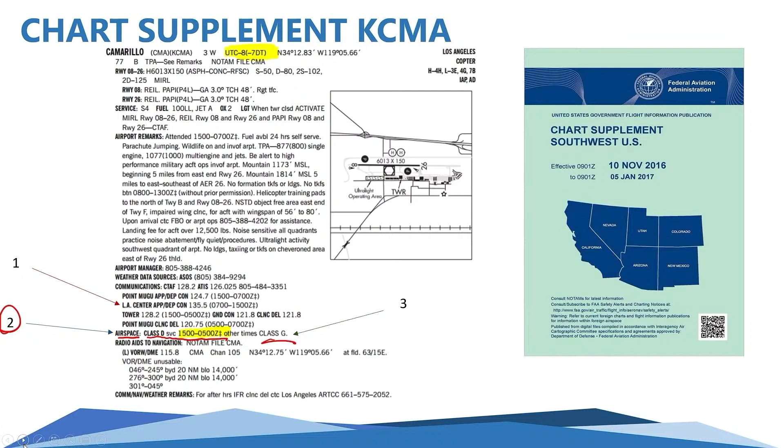The other thing that we also want to talk about is anytime you go into a class Delta, before you penetrate the airspace, you need to basically have permission to go into that airspace. So assuming that the tower is open, you need to establish two-way radio communication. To establish two-way radio communication, you basically need to call up the tower, whether you're taking off or you're coming into the airspace, and you just need to have them acknowledge you and your call sign.

So very simply, if I'm going to be flying in from, let's say over here, which is the east, and let's say I am Cessna 1234, that's my November 1234. All I need to do is say Camarillo Tower, Cessna 1234, about 10 miles to the east inbound with Victor for a landing. As long as they say Cessna 1234, continue, that's fine. Cessna 1234, number 2 straight in, landing runway 26, clear to land. Those are all going to be considered establishing two-way radio communication.

Now, if they say Cessna 1234 standby, that is also considered established radio communication. If they say Cessna 1243 because they get my call sign wrong, that is not going to be established. So you just need them to repeat your call sign. Unless they tell you explicitly to stay out of their airspace, you are going to be deemed to be establishing that two-way radio communication as long as they say your call sign.

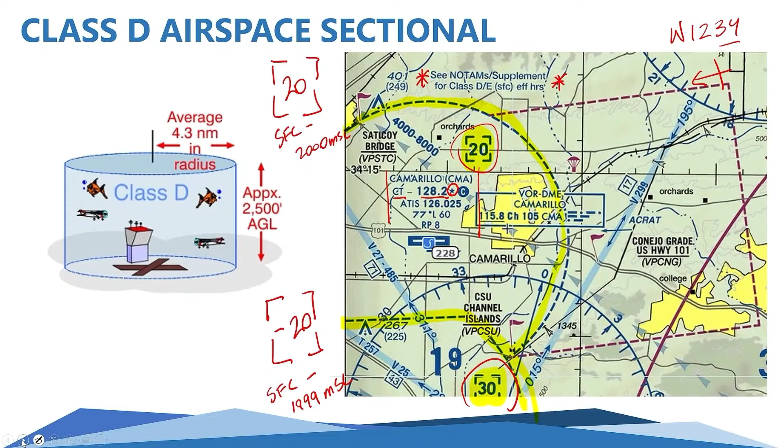So that is what is known as establishing two-way radio communication. The other places that we can find the information is there is a tower frequency. If you were to open up any of your charts, whether you're looking at your sectional or your TAC chart, somewhere along the edges they will have all of the information for the tower frequencies. It will let you know their hours of operation. It will also give you the tower frequency, the ground control, ATIS, which we'll talk about a little bit more, and the hours as well. So those are all included on there, even though you're going to find it right next to the airport as well. So that is basically Class Delta in a nutshell.

Class Delta, for the most part, is not going to remain Class Delta indefinitely, meaning that the tower is usually not in operation 24/7. Very rarely does that occur. Even at the busiest general aviation airport in the world, which is Van Nuys, that also closes, I believe, around 10 p.m. local time. So Class Delta airspace, just remember, is going to be surrounded by that blue cyan dashed line, and your dead giveaway for Class Delta, as I said before, is going to be that box with the number in it. So here for the Eugene Mahlon Sweet Airport up in Oregon, the Class Delta goes from the surface up to 2,900 feet.

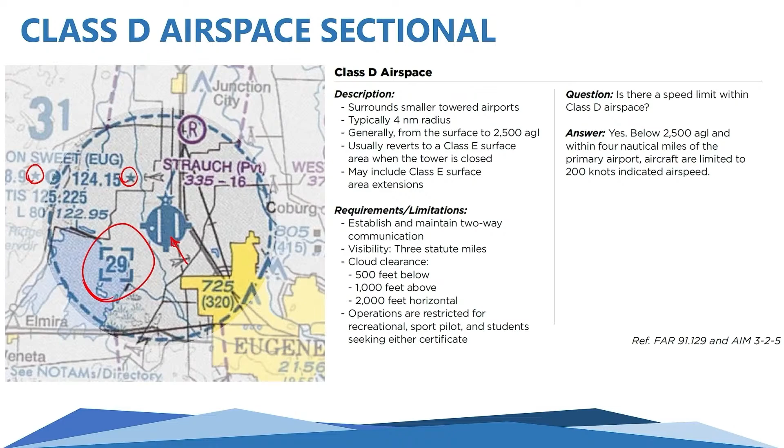We know that it's a towered airport because, remember the color coding of the airport, that cyan color means that there's a control tower. But also, if we were to look at these stars here, we know that the control tower is not open 24 hours a day. So we would check that green book and confirm what it's going to revert to. It's either going to revert to a Class Echo or Golf, and it will also give us the hours of operation as well. So remember that anytime you're flying within here, going back to our Airspace Triangle, this is the 3152. This is the Class Delta right here, and that's your 3 statute miles of visibility, 1,000 above, 500 below, and 2,000 feet horizontally.

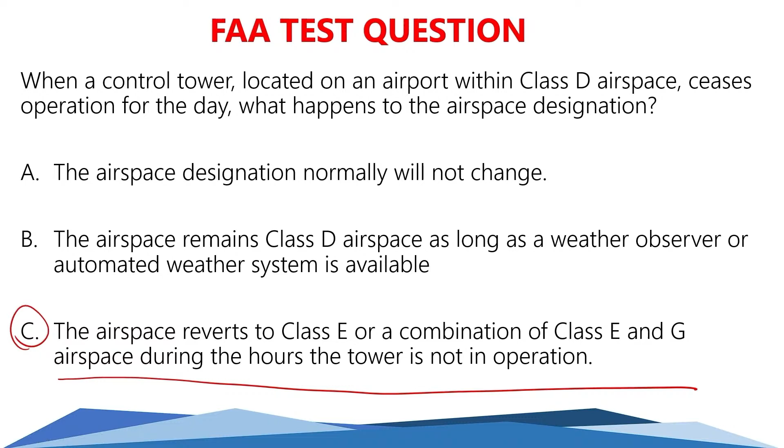And where we find this information is in the chart supplement, which is that green book. And like I said, we'll show you guys exactly how to see that and how to actually read that document on Wednesday. All right, moving on to Class Charlie.

Class Charlie looks like a simple upside down wedding cake. It always has 2 layers. There is an inner layer that has a radius of approximately 5 nautical miles, which basically goes from the surface to roughly about 1,200 feet, it just depends on the actual airport. And then the outer layer is going to extend up to a 10 nautical mile radius. And like I said, it just looks like an upside down wedding cake.

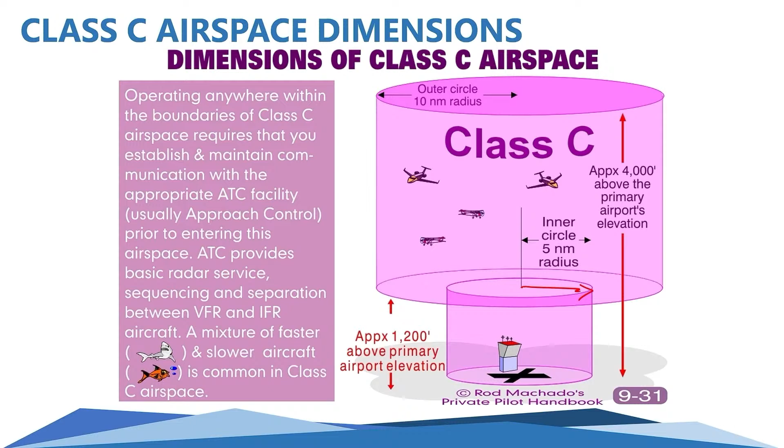Traditionally, the maximum altitude is going to be 4,000 feet AGL, so 4,000 feet above whatever the primary airport elevation is. Now, they're not necessarily all going to be perfectly circular like this. If you're in the Midwest and there's really no obstacles, then you'll probably see them nice and circular. Depending on where you're located, they might be staggered with different layers in them. So, for example, Beale's Class Charlie airspace, or the one that I'm going to show you, which is going to be the Santa Barbara Class Charlie.

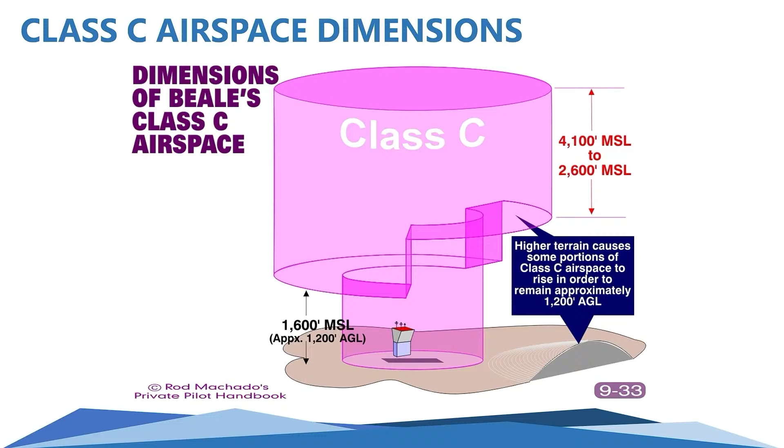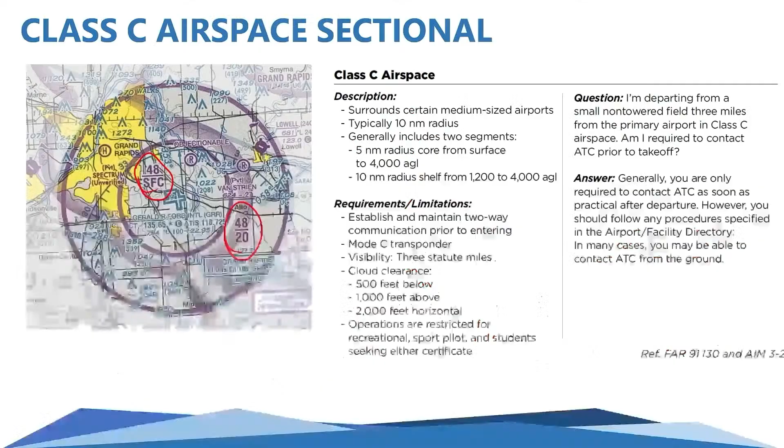All right, let's test your knowledge with the potential vertical limits of your Class Charlie primary airport. The vertical limit of Class Charlie airspace above the primary airport — remember, there's an inner ring and an outer ring. We don't care about the outer ring. We want to know what is the normal vertical limit of the inner ring. Is it going to be 1,200 feet AGL, 3,000 feet AGL, or 4,000 feet AGL?

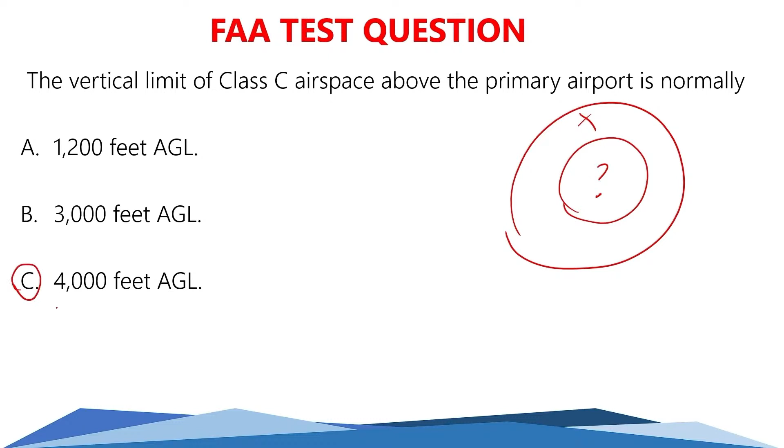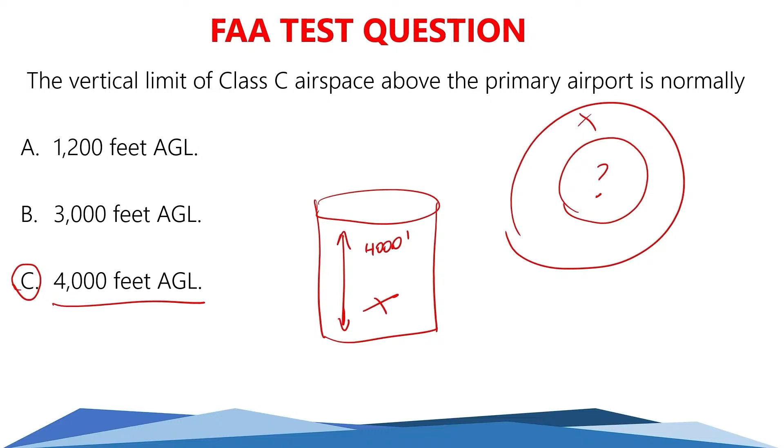All right, let's take a look at it. We got 25% of the class with A, 8% with B, and a majority of 65% of the class with C. So the correct answer is C, it is 4,000 feet. Basically, it depends — remember, this is AGL, above ground level. So traditionally, that inner ring, depending on wherever that airport is located, the vertical height of this is roughly 4,000 feet tall. You're just going to have to figure out, depending on where it's located. Obviously, if it's in mountainous areas, it might have a higher value than that, but the actual height is not going to be larger than 4,000 feet.

All right, the last airspace is going to be your Class Bravo airspace. This is your biggest and busiest airspace — think big, busy, Boeing as keywords. These do have control towers as well, and for the most part, most Class Bravos are going to be operational 24/7. These are the biggest and busiest airports in the country: Los Angeles, San Francisco, Vegas, Phoenix, Dallas-Fort Worth, Houston, Miami, all the New York airports, all the DC airports, Boston Logan, Nashville, Chicago O'Hare, Seattle, any of these. I think there's about 22 or 23 that exist around the country. And they look like upside down wedding cakes.

Some of them are very simple in their design, and some of them are not necessarily circular. In the Los Angeles area, we have one that is not really circular — it's kind of all over the place, I don't even know what the shape of it would be. But what you'll have is different layers. It will usually go from surface up to 10,000 feet MSL.

Now, to get into a Class Bravo, instead of just establishing two-way radio communication, you also need to get a clearance. So when you call up the controller, you're basically going to ask for clearance to get into Class Bravo. And the magic words you need to hear are your call sign — so, 'Cessna 1234, you're cleared into the Los Angeles Class Bravo airspace.' You've got to hear 'cleared into the airspace' and also your call sign. If you don't hear that, then you're not allowed to go in.

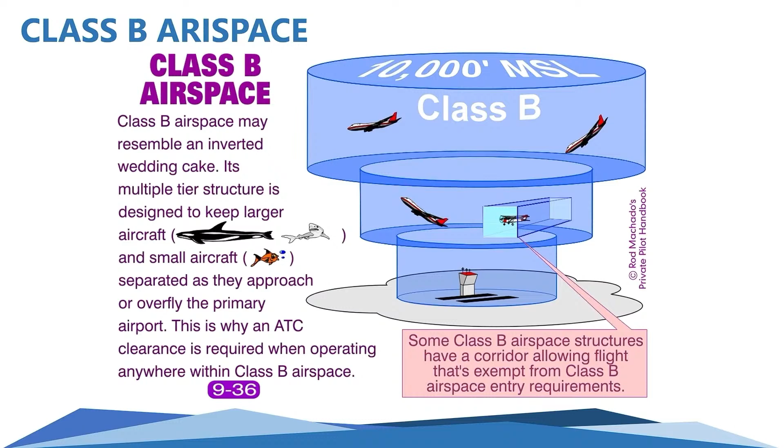We'll talk more about transponders, but there's a test question coming up called a 4096 coded transponder. A transponder is basically the way that air traffic control can see you. It's called a 4096 coded transponder because there are 4,096 potential unique codes that transponder can spit out. We'll get into more about the operations of that system on Wednesday.

Class Bravo is going to be at those larger airports. They're going to have multiple different ceilings and floors. Majority of them are from surface to 10,000. There are exceptions like Boston Logan, where the highest altitude is up to 7,000. If you go to higher airports like Denver or Salt Lake, they actually go above 10,000 just because the airport elevation or field elevation is already fairly high.

The inner ring that we see here is going to be a solid blue, and the solid blue is from surface to 7,000. We have an outer ring from 2 to 7,000, and then another ring from 3 to 7,000. There's another portion in this corner which is 4,000 to 7,000, and basically everything else here is 4,000 to 7,000.

The way that you can identify a Class Bravo is going to be a solid blue, that solid cyan color - that's your rapid identification. Remember, Class Charlies are solid magenta, solid blues or cyans are going to be your Class Bravos. Just like we saw before, if you look at the edges around a Class Bravo, you'll also see who owns it. It should say somewhere around here, Boston Logan Class Bravo. I believe it's cut off on the map at the top here that's unshaded.

The other thing you'll also notice is something known as a Mode C veil. It's basically a 30 nautical mile ring that extends from the primary airport, which is Boston airport right there, and it goes from the surface up to 10,000 feet. Anytime you're flying within the ring and also within the Class Bravo, you need to have a Mode C encoding transponder. Mode C, besides just providing a location, is also going to provide an altitude to air traffic control.

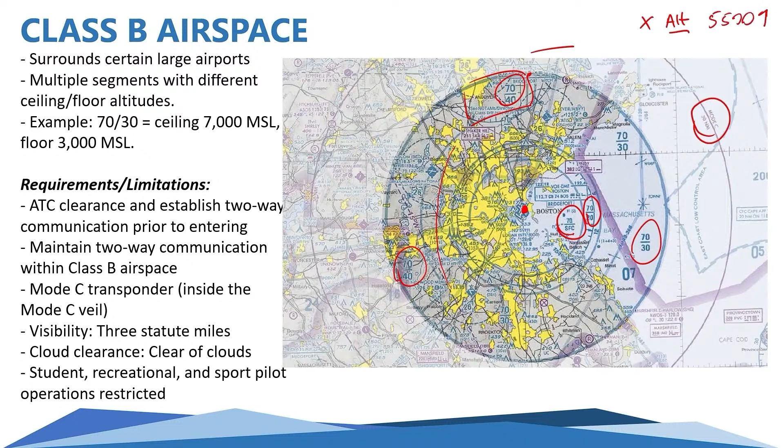So you're at 5,500 feet and you're climbing. The most basic type of transponder is called a 4096 coded transponder - that just provides the location. But if you have either a Mode C transponder or a 4096 coded transponder with altitude capabilities, then it's going to provide the target and also the altitude to the air traffic controller. That is effectively what a Mode C transponder is, and we'll talk more about the operation of that moving forward.

Now, the other thing we'll also talk about is the 3 statute miles of visibility, clear of clouds. A lot of people were asking yesterday what that means - clear of clouds. You can get as close to a cloud as you want, you just can't have any part of the aircraft go into the cloud at all.

Then finally, this is one where there are certain licensing requirements. For the most part, student pilots can fly into Class Bravo airspace, but there are about 12 or 13 airports around the country where you do have to be a licensed pilot, meaning a private pilot or higher, in order to actually land at the facility.

So what we mean by that is the primary airport that the Class Bravo is basically protecting, in this case, is Boston Logan. If it's on the list - and I have to go pull the list - I can tell you, like San Francisco International, LaGuardia, JFK, Los Angeles International, those are airports that a student pilot cannot land at because they're off limits. But if you're a student pilot, you have the ability to fly in and around a Class Bravo as long as you have certain endorsements from your instructor and additional training along the way. Okay, alright. Then finally, we have our special VFR.

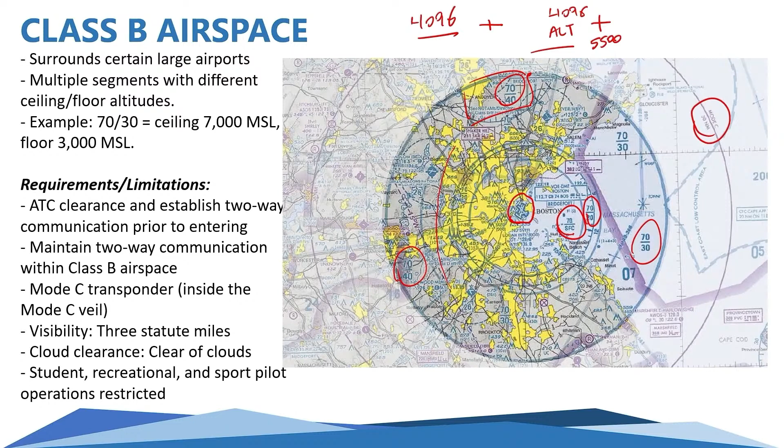Remember, basic VFR is 3 statute miles of visibility and at least a 1,000-foot ceiling. You're going to see this number a lot, so commit it to memory. The ceiling is the lowest of either the broken or overcast layer, so anything less than these values is going to be considered IFR.

Now, in the event that you're trying to get out of the airport or back into the airport, and it's going to be considered IFR at the airport, you can request something called a special VFR clearance. For special VFR, you need basically 1 statute mile of visibility and to remain clear of clouds. You want to be fairly certain you can get either into or out of the airport. It doesn't allow you to penetrate any clouds, but it might help out in the event that a marine layer is coming in.

So in this example, let's assume your airport is down there, and you can't go into any of the clouds, but if you see a gap like this, you could start descending early, and assuming the airport is IFR, you could potentially get back into that airport.

Just use caution when you do this. Keep in mind you don't want to do something called scud running, which is basically flying right against the ceiling of the clouds, trying to fight terrain. A lot of times people get into accidents because the terrain rises rapidly and you're not paying attention, and obviously you can't go through the clouds, so you're kind of stuck. A lot of times it's just better to call it a day and not fly in those conditions.

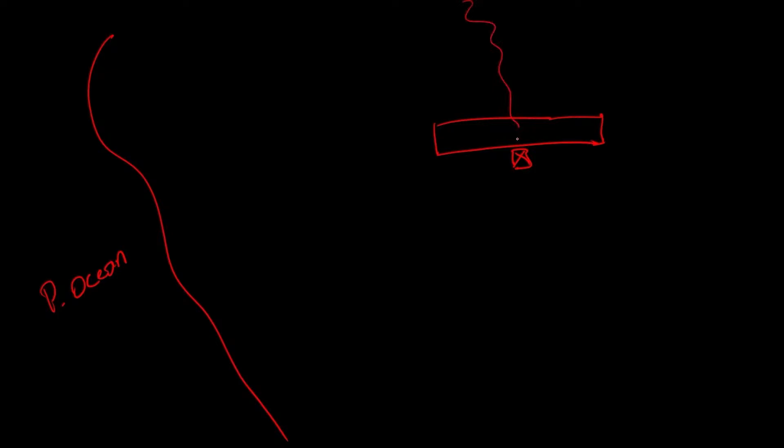At certain airports like Camarillo, we actually get a marine layer quite frequently. Here's basically the Pacific Ocean over here, and we have a runway right here, with the weather sensor happening to be right smack dab in the middle of the runway. A lot of times the marine layer comes in like this, and it's going to cover up the weather sensor, where it's going to report conditions of basically a 900-foot ceiling, which means the airport is now IFR.

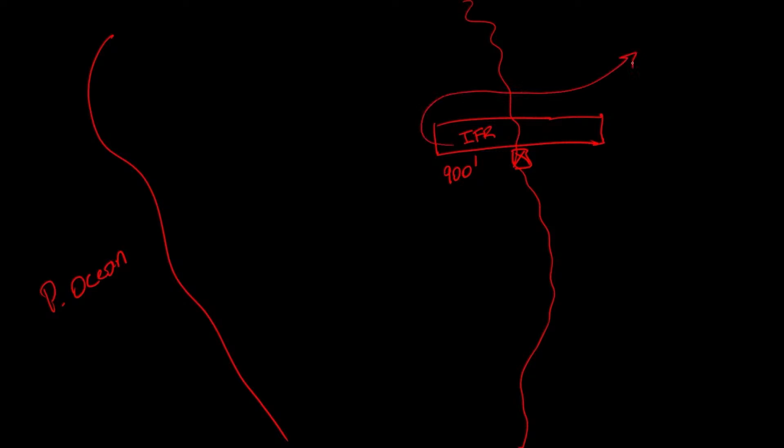Yet everything to the right of that squiggly line is basically going to be clear, clear as day, and potentially you're coming back into the airport. You could request special VFR, or maybe you're doing a big trip to Vegas and trying to get out of the California area, so you could request special VFR to get out, stay below 900 feet, and then climb over to Vegas where it's nice and sunny. So there are some exceptions, and you want to be very judicious if you're going to be using special VFR.

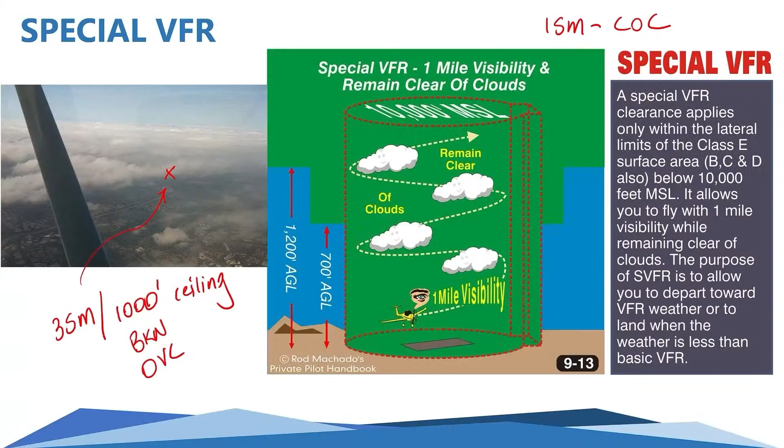Then finally, we've got some of our VFR corridors within Class Bravo. Anytime you're within Class Bravo, especially the LA area, I showed you guys all the different ways to get in and around. You'll see these arrows that go up and down, and there's one right here for the mini route, the coastal route. This is the Coliseum route, and I think this is called the Hollywood Park route. So we could look on the TAC and figure out how to actually traverse the Los Angeles area, because we can't just fly anywhere we want in LA.

This is used by air traffic control to basically route VFR traffic through the Class Bravo airspace. You can find these only on your terminal area charts. The requirements are that you need air traffic control clearance, you have to have a Mode C transponder, which tells ATC your position and provides altitude information, and you have to adhere to the published route and any air traffic control instructions they may give you.

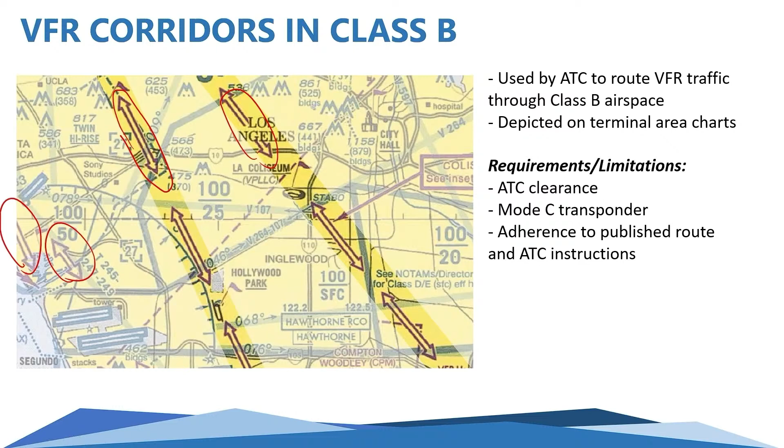All right, so what is the minimum radio equipment? Let me open up the poll here.

What minimum radio equipment is required for VFR operation within Class Bravo airspace? Is it A, two-way radio communications equipment and a 4096 coded transponder? B, two-way radio communications equipment, a 4096 code transponder, and an encoding altimeter? Or C, two-way radio communication equipment, a 4096 code transponder, an encoding altimeter, and a VOR or TACAN receiver?

If you didn't hear some of any of those buzzwords, it's probably not the correct answer. Mode C and ADS-B, that is correct, Josh. We'll get more into ADS-B on Wednesday and Friday as well.

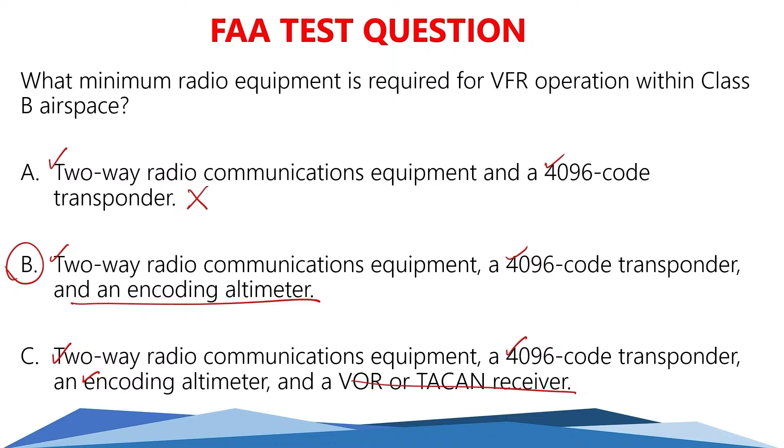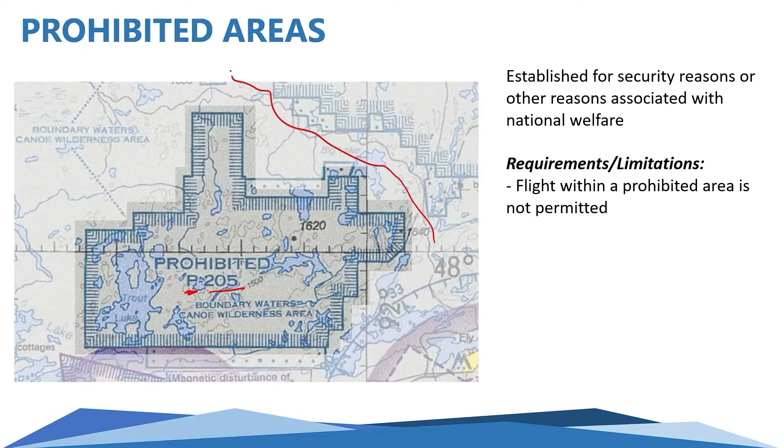You want to stay well clear of these and allow a couple miles for navigation purposes. I wouldn't necessarily try to sneak between two prohibited areas. Remember, prohibited means not allowed to be flown within.

Restricted areas separate civilian traffic from potentially hazardous military activities. They're identified by a blue comb symbol, and everything within this comb is restricted area 6402 Alpha. We can look up 6402 Alpha, which I'll show you after the break, to see the hours of operation and who to contact.

You do have the ability to fly through a restricted area, but you need permission from the controlling agency. Using R6402 Alpha, we can figure out who the responsible controller is and make that request. 98-99% of the time you can ask permission, but 98-99% of the time you won't get it—it just depends on what's going on.

So VFR flight is allowed through a restricted area, but only with permission of the controlling agency. Other than that, it's pretty much not allowed.

The next one is called the warning area. Warning areas are off the coast of the United States, either Pacific or Atlantic, extending 3 nautical miles off the coast. They warn pilots of potentially hazardous activities from the surface up to 10,000 feet.

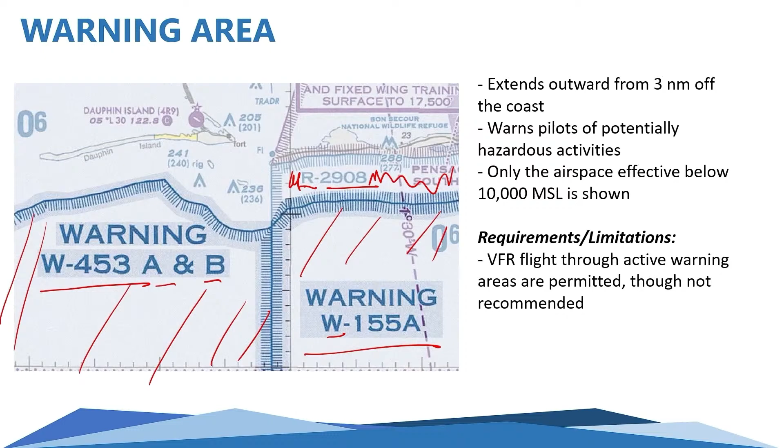You have the ability to fly through a warning area, although you always want to check if it's active. But even if you don't check, you can still fly through it. Right above that, be careful—here's restricted area 2908, so we can't fly through this area to the north unless we have permission from the controlling agency.

In some of the busier parts of the country, like up in California, these are called alert areas. They have a high volume of pilot training or unusual aerial activity, usually associated with an Air Force base. Alert areas have a purple or magenta comb, and always start with the prefix A, like Alpha 632 Alpha.

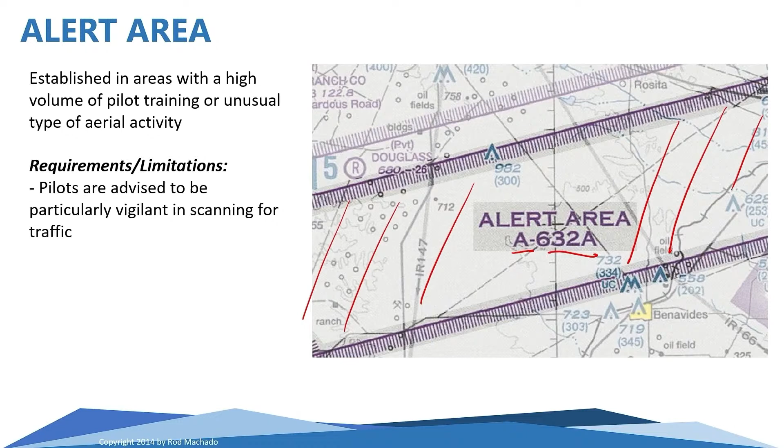You have the ability to fly through an alert area and don't need to contact anyone, but remember, anytime you're flying through one you want to be very vigilant and keep your eyes outside, always scanning for traffic, since it's traditionally a lot busier than the surrounding airspace.

You have the ability to fly through a MOA without contacting anybody, but use extreme caution if you do. It's always advised to contact the controlling agency to see if the MOA is hot or cold. Even if it's active and hot, you can still fly there—just use extreme caution.

MOAs are basically the same thing as a warning area. Warning areas are off the coast of the United States, while MOAs are inland, usually surrounded by restricted areas or very close to military bases of some type.

These are basically visual routes that we can see here. And it will either have three numbers, or it'll have four numbers after it. So typically, if you have a military training route with four numbers, that means that it's going to be a high-speed route at 1,500 feet AGL, above ground level, or below. So these are basically very low altitude, high speed routes. And then anything with three numbers after it is going to be above 1,500 feet AGL.

That is all in local time on those charts. The NOTAMs will be in Zulu time.

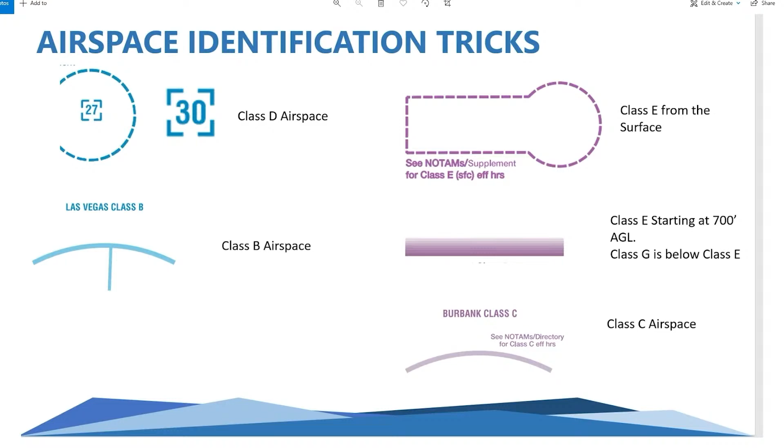All right, so we're going to move on to our Federal Aviation Regulations so we can get back on schedule. The Federal Aviation Regulations are known as your FARs. So I'll show you guys exactly what that looks like. To get the most up-to-date and accurate information, you always go to the government website. There are a lot of books out there. This is a book printed by ASA. There's a ton of companies that print these. Basically, they take the government regulations and print them. Now, the government regulations are adjusted far more frequently, so this is already outdated by the time it's printed, even though it's 2022.

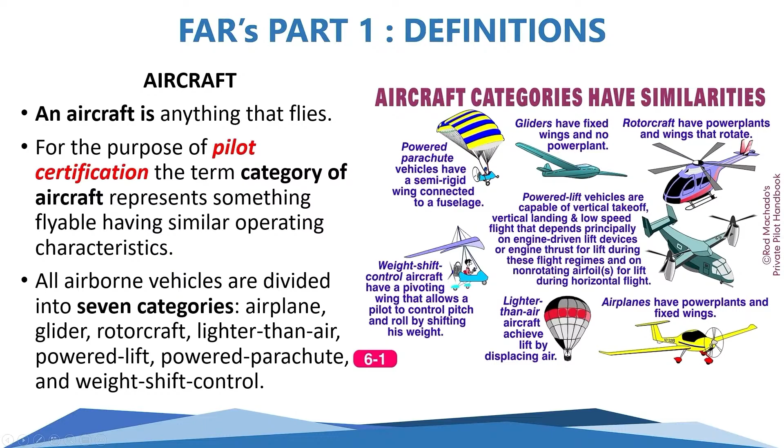So looking at your pilot certificate, assuming you all signed up on IACRA, like we said the first day, and got your student pilot license, you'll have your name and address and information there, and it will basically say student pilot with whatever your certificate number is. That will basically be the most simplistic license that you'll get.

As you progress through the system and get your private pilot's license, it will say private pilot on the front, and on the back it will show what you're basically allowed to fly. The category in this case is airplanes, and you can only fly single engine land. This is called the category, and the other one is called the class, which we'll talk more about.

For the purposes of pilot certification, aircraft are broken into basically four classes. You can either be single engine land, single engine sea, multi-engine land, or multi-engine sea. You'll have one of those, and if you end up getting additional check rides and licenses, you'll have more than that listed on your actual pilot certificate.

Just because you get airplane single engine land does not mean you can jump into a helicopter. It does not necessarily mean you can jump into a balloon or a glider. You have to make sure that you're licensed appropriately.

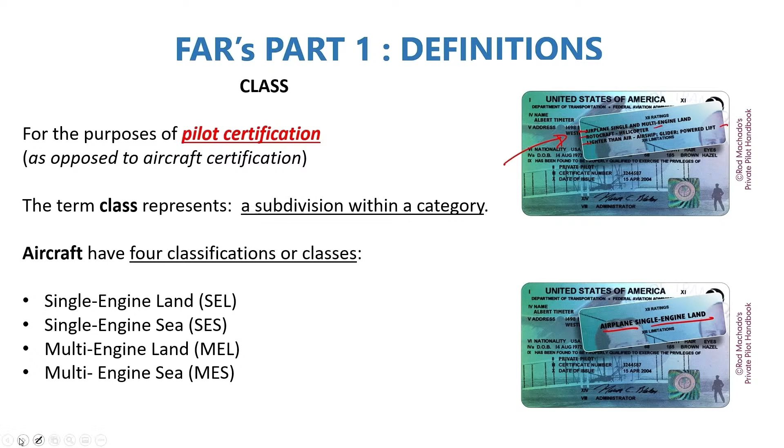The other thing we want to be aware of is something known as make and model. Make and model really only applies to you as a student pilot. Throughout your student pilot career, you're going to get a number of different endorsements, which is basically something very similar to what we're giving you here at the end of your training.

Once you pass this training and are ready to take your knowledge exam, you'll see an endorsement that looks something like this. It will basically say, 'I certify John Doe has received the required training in a specific' — and this is what we mean by make and model.

Normally you are not restricted to make and model — you're actually not restricted at all once you are a licensed pilot, meaning you have a private pilot certificate. We do not say that as a private pilot you can only fly a Cessna or a Piper or a Cirrus. You can basically fly anything within that realm as long as it fits within the category and class.

The make and model could be something like an A36 Beechcraft Bonanza, a Cessna 152, a 172, or a Piper Malibu. As I said, you'll be limited as a student pilot to any specific make and model endorsed by your flight instructor. Anytime you're given an endorsement, you have to follow it in terms of whatever the instructor actually writes on there. Once you're a licensed pilot, you're not going to be restricted to a specific make and model.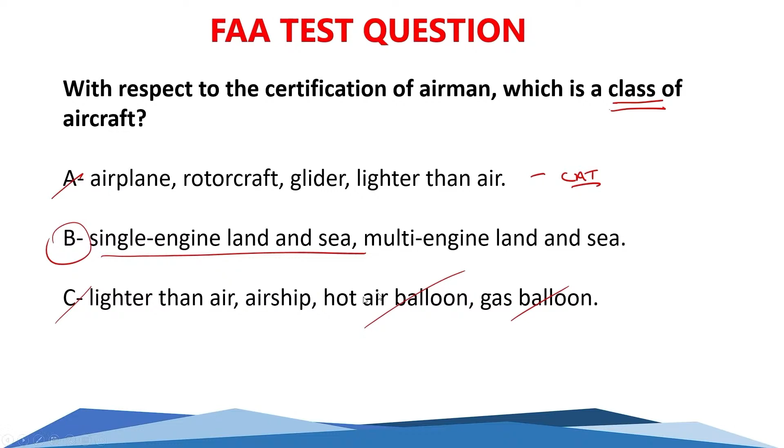90% of your attention when you're flying needs to be outside those windows, looking around, making sure that you are clear of other traffic. And then 10% is really looking inside to verify that the aircraft is doing what you think it's doing. So are you actually in a climb or a descent?

Are you holding straight level? Are you holding your altitude? So by doing this, we talked about this in our last lesson. We basically have a specific in-flight visibility that we have to maintain depending on the airspace that we're flying in. And we have a minimum distance either above, below, or horizontally from any cloud formation. So we're not actually allowed to fly into the clouds whatsoever.

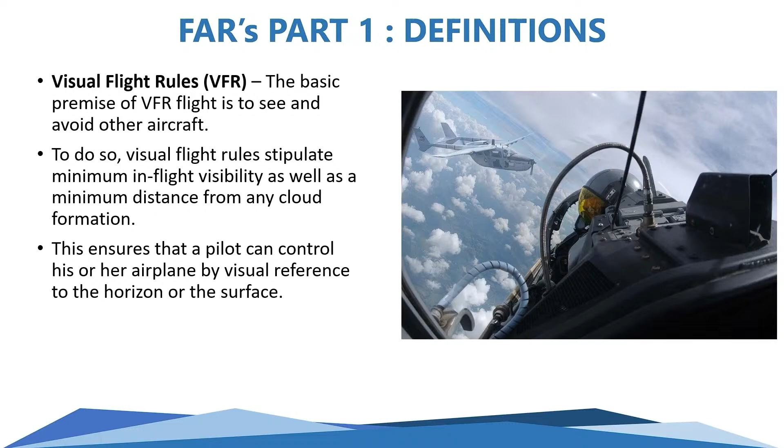And the whole purpose of VFR is that you should be able to fly that aircraft solely by reference, visual reference, to the horizon or the surface of the Earth. On the flip side, if you go beyond your private pilot training, you could get an instrument license, which is why we have the IFR class, the instrument class, learning all about the new regulations and the things we have to know as instrument pilots to fly in these types of situations. So IFR is instrument flight rules.

It is a subpart, basically a certain section within your Part 91. We're not going to talk about it in this class, but that is your instrument training. And then once you get your instrument rating, you can basically fly under IFR flight rules or conditions. So within this, you have the ability to fly through the clouds and also in reduced flight conditions. We fly different approaches to get back into the airport. And primarily what we're doing is flying the aircraft solely by reference to the flight instruments instead of looking outside.

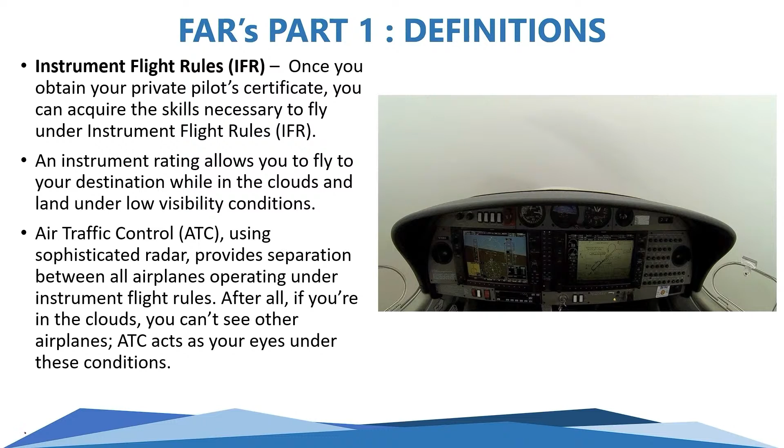Air traffic control is going to use all their radar and services to basically provide separation between all aircraft operating under instrument flight rules. And then if you're in the clouds, you can't see other aircraft. So basically it defaults to ATC to act as your eyes within those circumstances. That would be your next step if you're interested in putting more tools in your toolkit.

The last one we need to look at, actually second to last, is the definition of night. It seems very obvious that when it's dark, that's considered night, but nighttime is officially defined as the time between the end of evening civil twilight and the beginning of morning civil twilight, and this is published in the American Air Almanac. So very simply, anytime we're dealing with regulations talking specifically about hours of darkness, it is referring from sunset to sunrise.

If we're dealing with the term night or nighttime, and it's specifically used, then we refer to the time between the end of evening civil twilight and the beginning of morning civil twilight. So usually this is when the sun set, but there's still some residual light in the sky, or the same thing in the morning. Usually the way this works is if sunset was around 6 p.m. local time, it would not officially be night until about 30 minutes after.

So that would be roughly around 6:30 p.m. And that's basically when the sun is 30 minutes after the sun has set, or 30 minutes prior to the sun actually rising. You can look up the official time. It's roughly 30 minutes, but it changes every day based upon the American Air Almanac.

The reason why we're going to look at this is we're going to look at something called currency. There are certain things we have to do to maintain our nighttime currency in order to continue flying at night. We have to do a certain amount of takeoffs and landings, and it's got to be done at night. So we'll look at how that is defined moving forward.

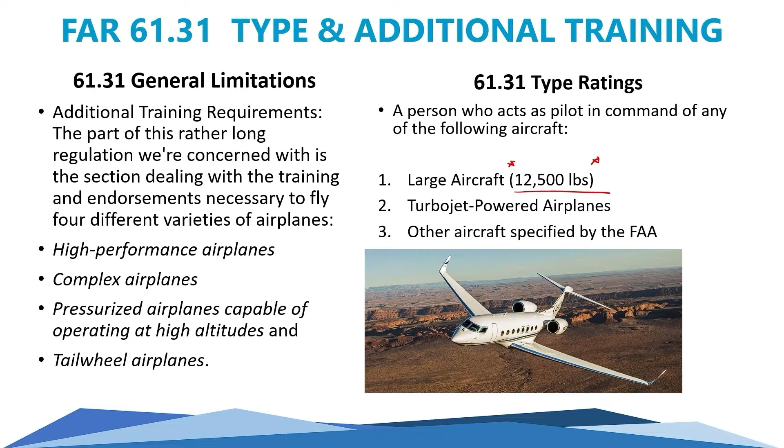The first one is called a high performance aircraft, within the same regulations. A high performance aircraft is defined as an airplane having more than 200 horsepower, or what I like to say, 201 plus - does not include 200. You'll notice a lot of airplanes are exactly 200 horsepower, because as soon as it's 201 or greater, it's classified by insurance companies as high performance, and the insurance rates go up on it.

In order to get your high performance endorsement, you have to have received and logged both ground and flight training in such an airplane from an authorized instructor. Once again, you'll get a one-time endorsement in your logbook certifying that you're proficient to operate a high performance aircraft, and that will apply to any high performance aircraft you fly.

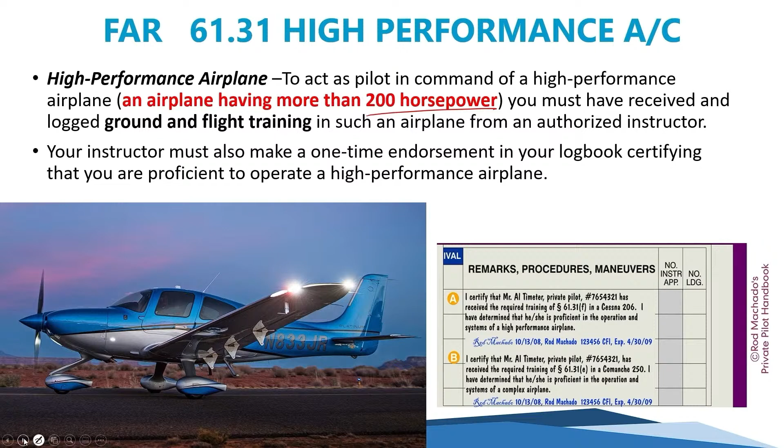The next one is called a complex aircraft. A complex aircraft is defined as needing all three: retractable landing gear, flaps, and a controllable pitch prop. Even if it has two of the three, it won't qualify - it needs all three. If it does not have a controllable pitch prop, that could also be replaced with an electronic engine control system, also known as a FADEC. Some airplanes do have that.

In order to act as pilot in command of a complex aircraft, you're required to basically finish ground and flight training from an authorized instructor, and you'll once again get a one-time endorsement that will cover any complex aircraft you fly.

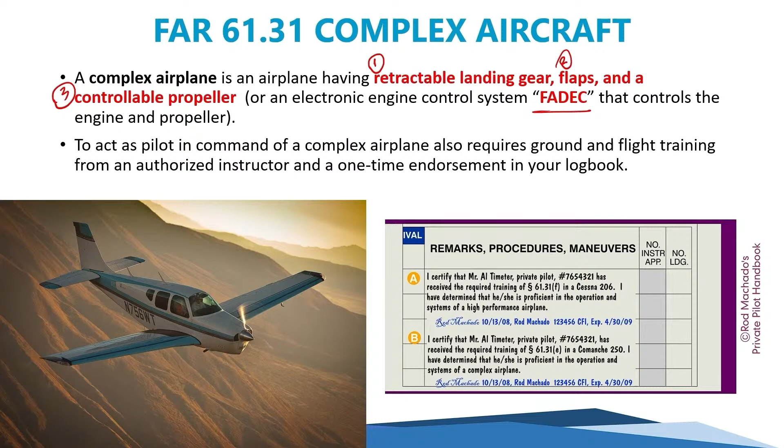But it is possible just with the basic license that you will have. Now, keep in mind, the capability of the aircraft is above 25,000 feet. So even if you're a private pilot and the max altitude you could fly is 17,999, that 25,000 feet threshold is based on the aircraft. So no matter what, even if you have no desire of operating the aircraft above 25,000 feet, if the aircraft is capable of it, you are going to be required to get the ground training and flight training from an authorized instructor in that pressurized aircraft.

This is also a one-time endorsement, and this is something that does need to be done in person. For example, the first one we covered, the high performance, that can actually be done on a simulator, although I would encourage you to just do it in the actual high performance airplane.

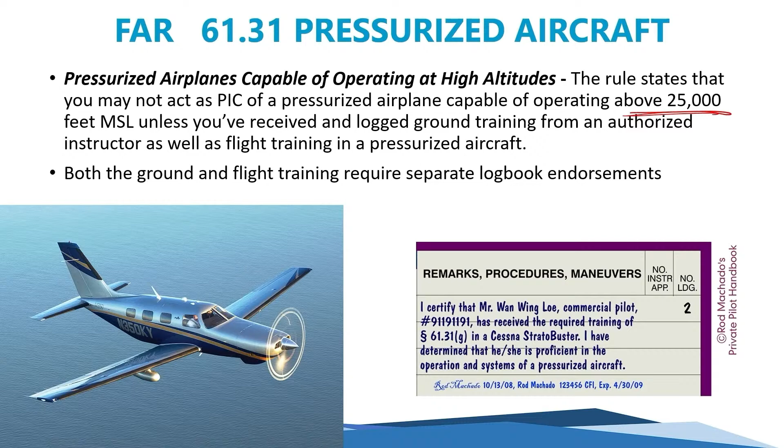So you're going to have to basically do some ground and flight training. On average, tailwheels actually take about 5 to 10 hours to get your tailwheel endorsement - it's one of the longer ones out of the bunch. The instructor has to find you proficient in the operation of the tailwheel airplane for normal and crosswind takeoffs and landings, wheel landings, and also go-around procedures.

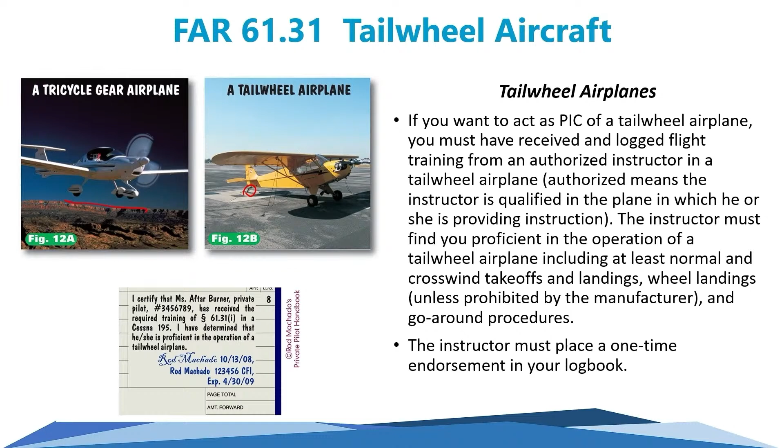So this is one that takes a little bit longer to learn. It's also a very good way to really learn your stick and rudder skills, primarily your rudder. You'll have a much greater appreciation of utilizing the rudder if you end up operating a tailwheel. The instructor is also going to give you a one-time endorsement within your logbook, and then you're set for life moving forward.

Okay, so a couple questions that are going to relate to the additional endorsements or potentially the type rating. What is the definition of a high-performance airplane? Is it A, an airplane with an engine of more than 200 horsepower, B, an airplane with 180 horsepower or retractable landing gear, flaps, and a fixed pitch prop, or C, an airplane with a normal cruise speed in excess of 200 knots?

Awesome, Dan. Welcome aboard, sir.

Got one more test question after that, and then we'll take that 5-minute break coming up here. Got about half the class answered this question so far.

All right, got about 75% of the class in with this.

If you train in a tail dragger, Pat, you will most likely get an endorsement when it comes to soloing. Same thing if anybody wants to train in a high performance aircraft or complex aircraft, you're going to need the endorsement when you solo anyways. So high altitude pressurized endorsement, you actually have to do it inside the airplane itself. So those airplanes, I've seen it run about $1,000 or $2,000.

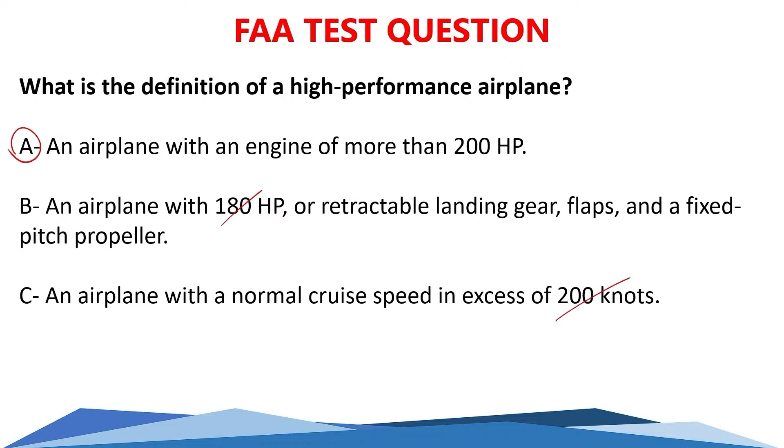All right, last question before we take that 5-minute break here is going to be dealing with the type rating. So let's go ahead and pull this one. The pilot in command is required to hold a type rating in which aircraft? Is it A, an aircraft operated under an authorization issued by the administrator, B, an aircraft having a gross weight of more than 12,500 pounds, or C, an aircraft involved in ferry flights, training flights, or test flights?

I think someone else was asking how much is the type rating. Depends on the aircraft that you're flying. So if you end up getting a type rating in, let's say, a 737, those are about 10 grand. Gulfstreams are absolutely ridiculous, I think I've seen them for like 30 to 40,000, depending on which Gulfstream you want. And some of the cheapest ones are like 2,000 or 3,000 for some of the citations out there. But that's like going to school and just learning about all the systems inside the airplane. You usually go into the simulator and you usually have to do somewhere between 10 and 20 hours, and you actually take another check ride to get a type rating as well.

So, got about 50% of the class in.

You guys have a lot of cats out there, don't you?

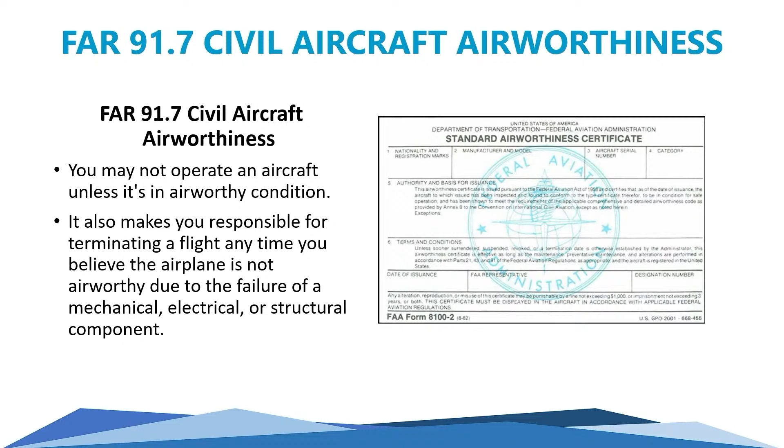So as a pilot in command, you are actually required by this regulation to comply with all of the operating limitations. So that includes the POH and AFM, any type of instrument markings, and also placards that are found in and around the aircraft.

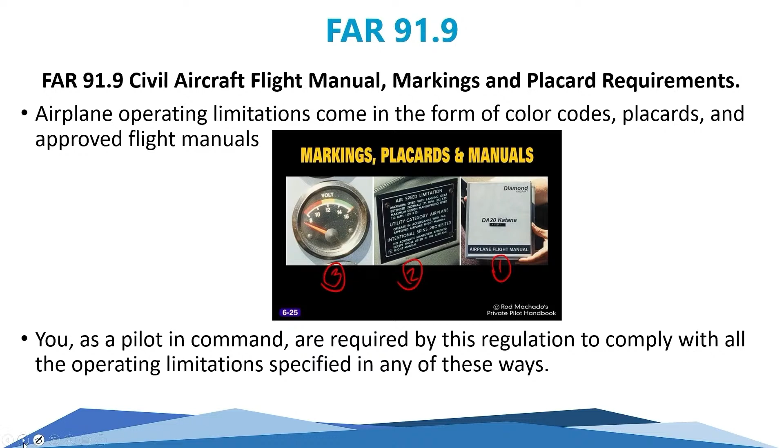For anybody here that likes to drop things, 91.15 will allow you to do so. So you do have the ability to drop anything you want from the airplane. The main criteria is that the pilot in command may not drop an object in flight if it creates a hazard to persons or property below. Okay. So other than that, if you're clear of people and property, then go nuts. You can drop whatever you want. I've seen sometimes they do like flower bomb drops where people will put out targets, and then whichever airplane gets closest to the drop, you win, basically.

91.103 is pre-flight action. This is an important one. So the mnemonic that we use is on the right-hand side. It's Northwest Craft, and I'll talk about that here in a second. So the regulation states that before you begin any flight, you are required to become familiar with all the available information concerning that flight. This is what we call a catch-all rule. So what you're going to notice is that within the FAA, there's several regulations that basically have, I would call it a catch-all rule, where it's going to tell you to do the minimum, and then somewhere else in the regulation, it's going to say it's your responsibility to make sure you have all the information available.

Okay. So the first part here is for a flight that's not in the vicinity of the departure airport, you must check the following. So you have to check weather reports and forecasts, fuel requirements, alternates available if the flight cannot be completed, and any known traffic delays advised by air traffic control. You are also required to check the runway lengths at airports that you're going to use. So very simply, if I'm going to do a local flight, maybe I'm just going to fly from Camarillo to Oxnard, which is about 5 miles away, all I would be required to do is actually just check the runway lengths for both Camarillo and the Oxnard airport, and I'd be good to go.

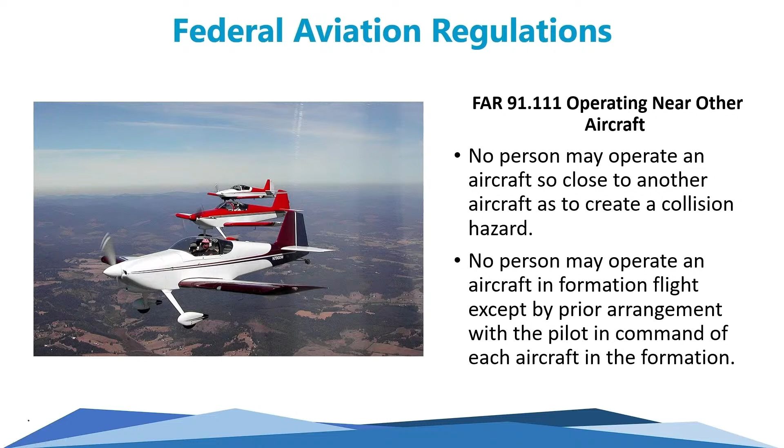All right, so here are your right-of-way rules. For all of you in the United States, traditionally what ends up happening is if two cars come to a four-way stop, at least in California, it's supposed to be the car on the right has the right of way. As we all know, at least in California, that's not always the case. It's usually who got there first. It's kind of the same way with airplanes.

The aircraft on the right is going to have the right of way over the aircraft on the left. The whole premise at the end of the day is the see-and-avoid concept under the visual flight rules, or VFR. To make this complicated, if you look at the entire regulation 91.113, it's really your responsibility. In the event there was some type of in-flight collision, the FAA is going to come down and say that it was a failure to see and avoid.

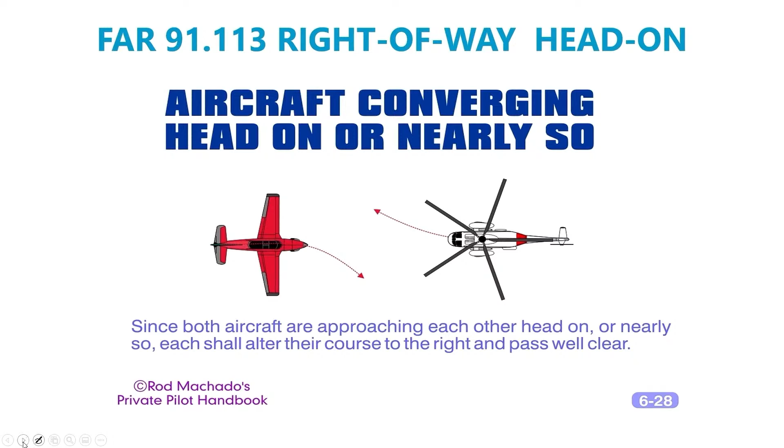In the event you're overtaking an aircraft that happens to be a bit slower, you're also always going to pass on the right. Keep in mind that when you overtake another aircraft, this is not the freeway where you overtake someone and cut them off within five inches. Make sure you give enough distance, traditionally somewhere between a quarter, sometimes a half a mile. I've seen people do a mile away, because if this red aircraft doesn't see you and they decide to make a right-hand turn without paying attention or looking, if you're too close, that could also lead to a collision.

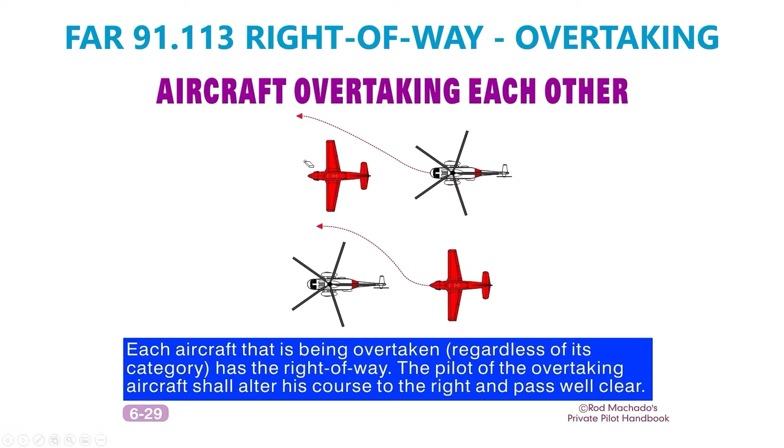Moving on, we have the right-of-way rules. The easiest way to think about these is the acronym A BIG R, and it's always in this order. Aircraft in distress, basically emergency aircraft of any type, have the right of way over all aircraft. After that, it's the least maneuverable aircraft, which is balloons. Balloons just go up or down and basically go wherever the wind takes them, so they have the right of way over all aircraft. Then it's gliders, airship, airplanes, and rotorcraft.

A couple things to keep in mind: an aircraft towing or refueling other aircraft has the right of way over all other engine-driven aircraft. These rules apply regardless of whether you're operating under instrument flight rules or VFR. Vigilance shall be maintained by each person operating an aircraft so as to see and avoid other aircraft. No matter what, it's always see and avoid - that's our number one rule. That's the reason your eyeballs need to be outside the cockpit more so than inside.

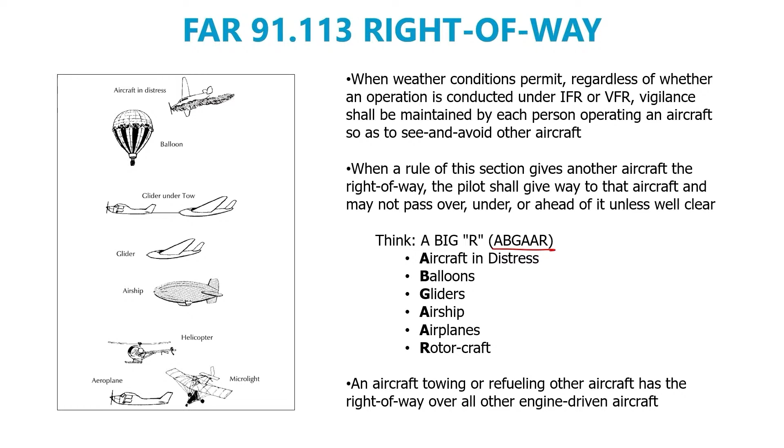Now, when you're coming in to land, the right-of-way rules change just a little bit. In this case, if we look at all three of these aircraft, assuming aircraft B has already landed and is getting off the runway here - it's not very clear from this image - then what you have is airplane A has the right of way because they're more committed to land than aircraft C, which happens to be crop dusting next to the runway.

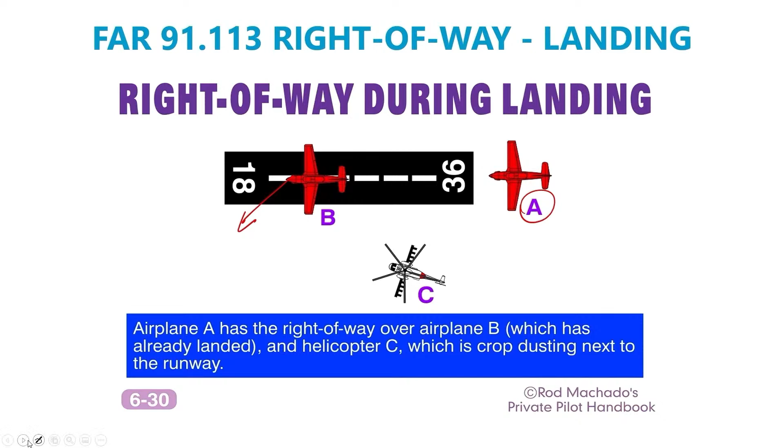Okay, so let's look at our final FAA test question of the night, and we are done, everybody. Let me go ahead and open this one up. When two or more aircraft are approaching an airport for the purpose of landing, the right-of-way belongs to the aircraft that, is it A, has the other aircraft to its right, B, that is least maneuverable, or C, at the lower altitude, but it shall not take advantage of this rule to cut in front of or overtake another.